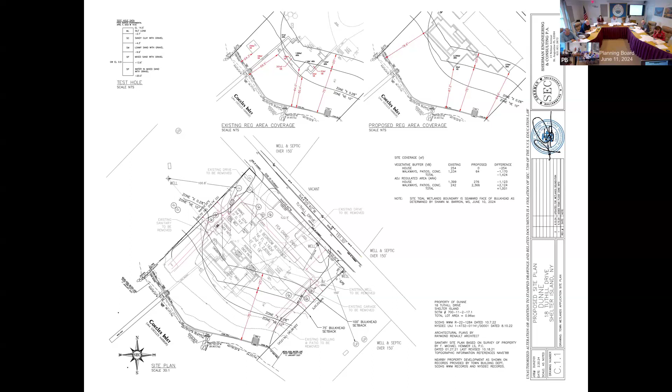This is the site as it exists today. Tuthill Drive is to the north, Coecles Harbor is to the south, and then you've got properties to the east and west.

Along Tuthill Drive you're at about a 16-foot elevation, give or take, up here by the road. You've got the flood zone, which goes from an X to a VE, a curved line that goes down

through the water side of the property, just to the water side of the existing house. There's an existing two-story dwelling with a deck on the water side, and also an existing two-story detached garage between the house and the road. There's a concrete pad down just off the bulkhead. The septic system is just under 100 feet to the leaching pools from the bulkhead, a shallow groundwater system, and the supply well is over here next to the garage.

It's an A zone, so we've got a 40-foot front yard setback running along the front of the property. For the principal dwelling, it's a 25-foot setback. For swimming pools and things along those lines, we've got a 20-foot setback on either side.

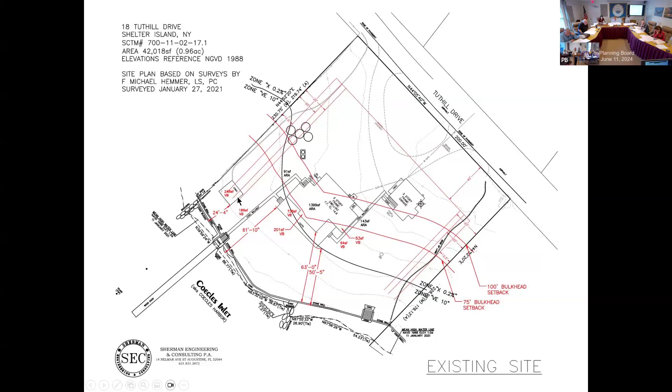From our wetlands, these are our 75-foot and 100-foot wetland setback lines. As the property currently exists, I won't go through all these numbers right now, but basically the house is as close as 63 feet to the bulkhead, so 63 feet from the wetlands. The deck is just under 62 feet from the wetlands. And we've got walkways, patios, and this other concrete pad within the vegetative buffer, and also the main part of the house within the adjacent regulated area.

So this is what we're proposing. The dwelling comes almost entirely out of the regulated area. We've got 276 square feet within the regulated area, that's within the 25-foot adjacent area. The patio and swimming pool are predominantly within the adjacent regulated area, and about half of it is outside of the wetlands regulated area.

Moving the wetlands boundary to the seaward face of the bulkhead brings us to 67 feet 3 inches to the seaward-most corner of the patio, so it's 64 square feet.

With our initial application submitted to the board, we were trying to keep everything outside of the regulated area and outside of the vegetative buffer by using the bulkhead as the boundary for the wetlands limit. What we're going to ask is that the board consider that 64 square feet as new construction that would qualify for the 100 square foot exemption. Everything else on the site has been there since long before the 2001 enacting of the wetlands code, so everything predates that and would be pre-existing.

It's just a cleaned-up version, makes it easier to see. We got rid of that septic system that's just under 100 feet from the bulkhead, putting in a new IA septic system. Right now we're looking at it up in this corner. We may end up moving it around a little bit, but keeping it in this corner, well out of the way from the wetlands boundary.

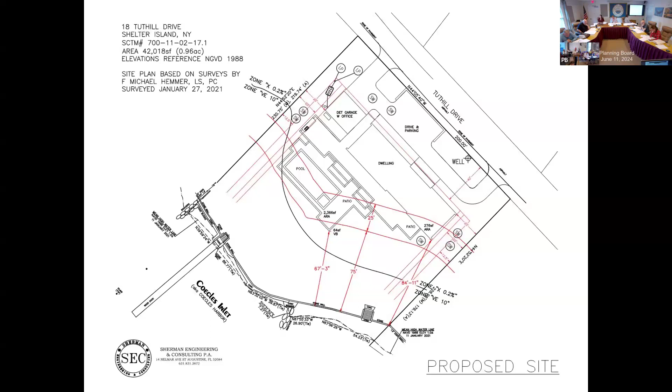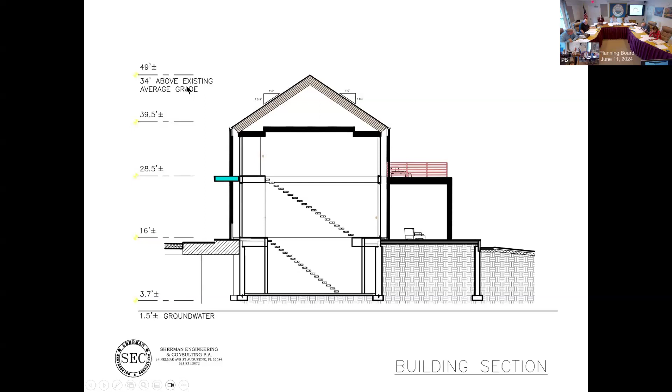This is just a section of the building showing its relationship to groundwater. Groundwater in this area is at about 1.5 feet. The bottom of the footings are going to be just over 2 feet from groundwater at 3.7 feet. The top of the house and the ridge of the house will be just about 34 feet above existing average grade, so all of that complies with the zoning code.

I'm throwing you a monkey wrench. No, absolutely, the swimming pool design in Hollander's page is a little different than what's on the site plan. I'll have to look at that. All right, just finish you up. I'll keep my comments for later. That's good.

Yeah, on the site plan there's a hot tub in that southeast corner that's not on Hollander's plan. Yeah, I can speak to that, if you'd like to come in and introduce yourself. Ray, please introduce yourself. Sure, sorry, Ray Reynolds, architect for the client, Charles Dunne. We've been working with Hollander on the landscape plan.

This planting plan has not been updated to reflect the new pool that you're seeing, but the pool location that matches in the site plan and the surveys is correct. This planting plan does need to have the pool updated—this was an earlier version that they had done. I noticed it didn't extend as close to the water as the one on the site plan, so we'll have that updated.

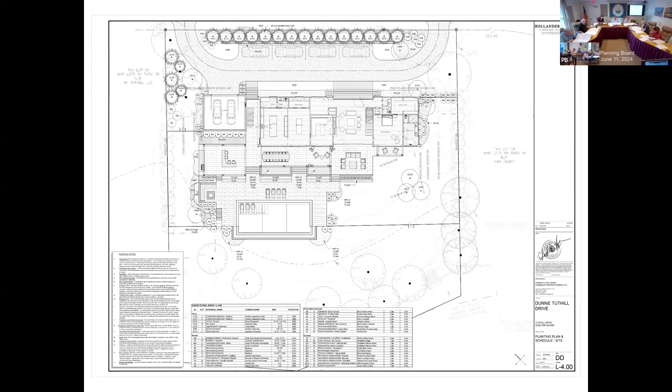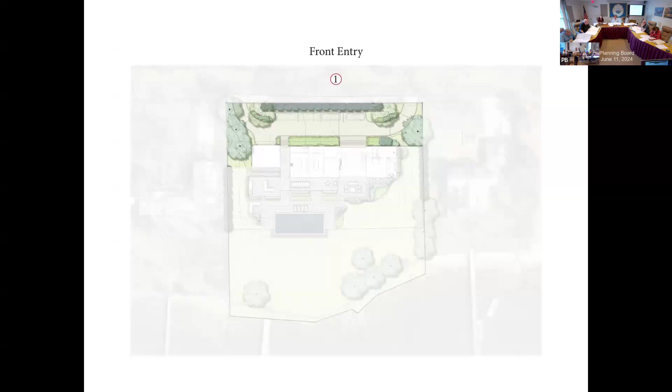So this is basically a stylized rendering of the overall plan. You've got a road portion which is going to have flowering trees, pines, dogwoods, things along those lines, and again it's all listed on that plan. And then also shrubs, designed so that they're flowering at different times throughout the year—from early-mid spring to mid-late fall, different things are going to be flowering at different times.

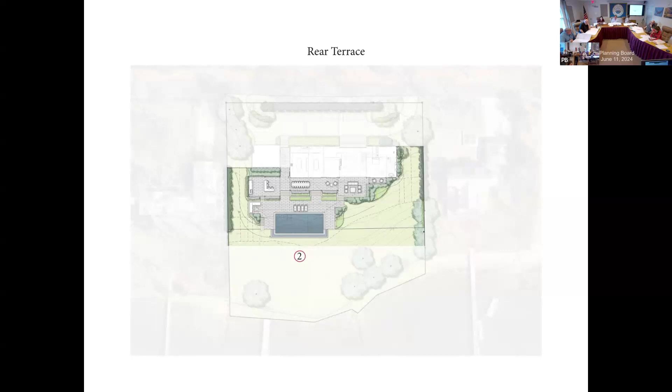And then that middle section of the property, basically around the building on the seaward side and by the swimming pool, along the same thing—a mix of trees, shrubs, things along those lines. Everything is native to the area; Hollander obviously knows what they're doing with these things, so it's all appropriate for the site.

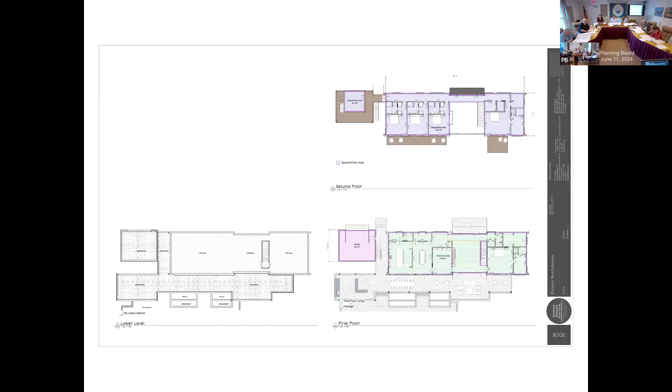It's a little bit better of a drawing, shows a little bit more, and it shows to what Ray was saying earlier about the swimming pool and the patio around the swimming pool. So that's the accurate layout.

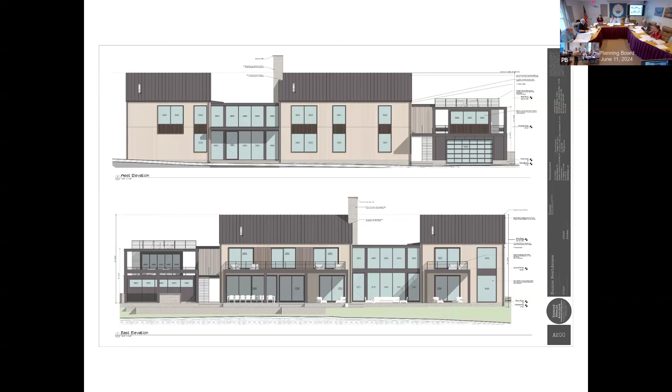And a couple of elevations—top one from the road, the bottom one is from the water. And then elevations from the sides. And some artistic architectural renderings of the building, just to give a feel for what it would look like on site.

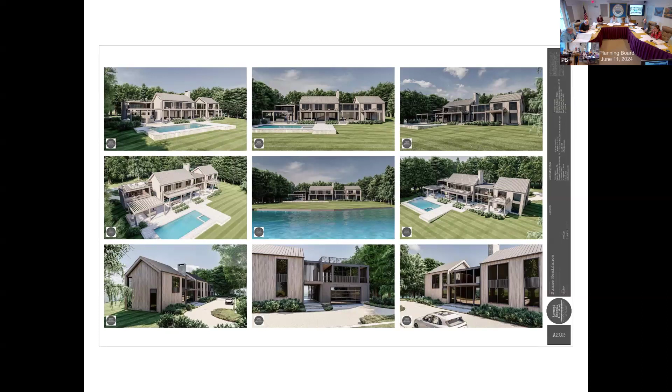You can see on this drawing down here, that second one on the far right-hand side, the way that the property slopes away—that's a pretty accurate representation of the way the grading is going to be. So that pool deck right now would be at about a 14-foot elevation at the top of the pool deck. The pool itself has about a 10-foot total distance from the top of the coping, from that 14-foot elevation, to the bottom of the structure of the pool. Groundwater at 1.5 feet gives us about 2.5 feet from groundwater to the bottom of the pool, so we comply with the town code and requirements as far as the pool construction is concerned.

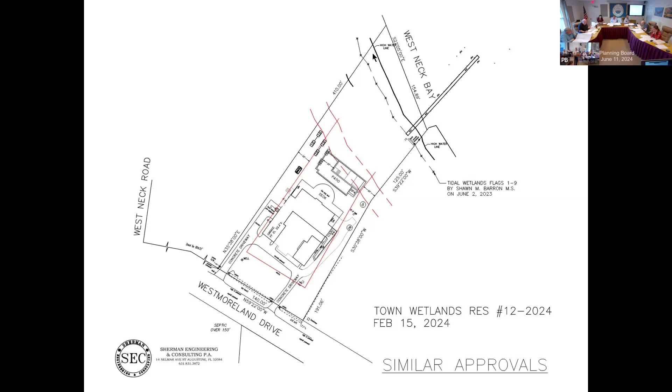And this is the basic design of the pool, the basic layout. So that's pretty much what I've got right now. If the board has any questions for me, I'd be more than happy to answer them. Also, if you have any questions for Ray or for the owner or anybody else, we'd be more than happy to answer.

Depth of the basement is currently 9 feet, and you're still 2 feet above groundwater with the footings. We're actually thinking of raising that a little bit.

Going back, I know you want to use the 100 square foot exemption for the patio bump out, but is there really a need for that? I don't see what the function of that would be.

It almost seems like Hollander's swimming pool is less invasive. Yes, I recognize the existing house extends into the vegetative buffer, but you are building a brand new house, brand new everything. You're not reusing the section of the existing foundation, you're just building it all new and wanting to match some of the encroachments.

We've had some internal discussions about that bump out, and if the board was willing to move the application forward, it's something that we may be willing to lose.

Initially, when Hollander was designing that area, the original pool, you'll note, is a negative edge pool. One of the things we didn't like about that was environmentally, you're using a lot of energy to get that pool up to temperature, because it thins out the water at the overflow. So we opted for a pool that does not have a negative edge, more of a waterfall edge.